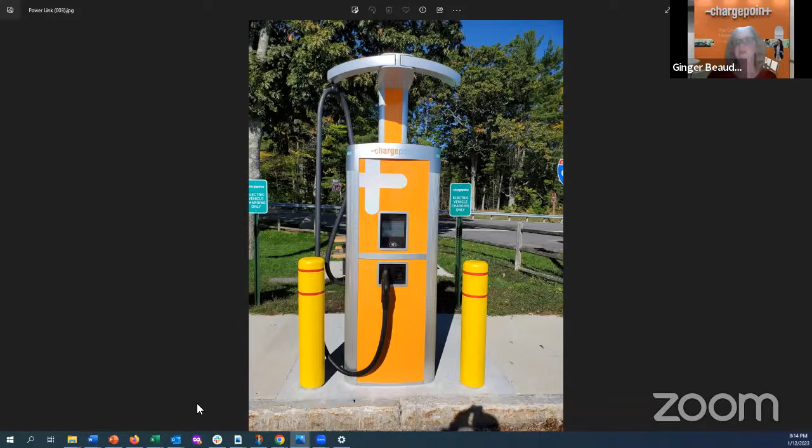The bollards that we have now are white, those are staying, so we're not getting new ones. What are those called? They're bollards, they're concrete here, it's really to prevent somebody from backing into the station. Yeah, protection. So bollards stay as white. Correct, yep, we're not changing the bollard. So what's out there right now is what will remain.

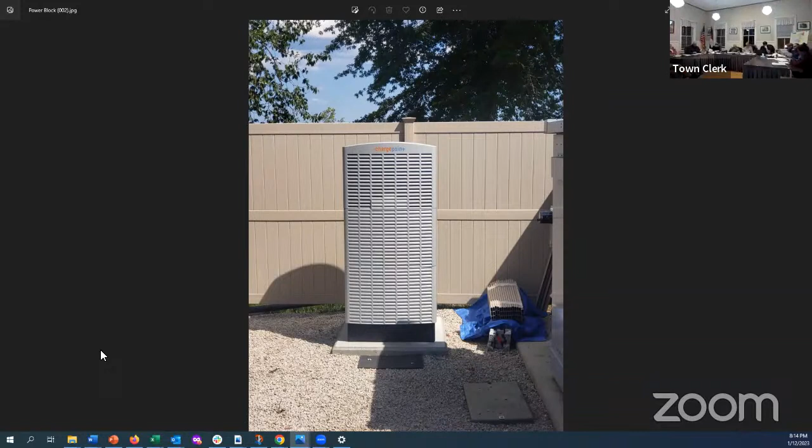Now, there is a new power block? Yes, I do have a photo of that as well. And is there any new switch gear? No, we're using the existing. We would love to get the existing colored. The existing was supposed to have been painted dark gray, and it was not painted dark gray.

I can look into that. I don't know that we have the ability to, I'll have to check and see from the manufacturer whether that can be painted. So that's what was agreed to in the first submittal, dark brown or dark gray.

Okay, so this is what we'll be adding, just the small power block, correct? And that's the piece on the ground. That's this right here, yes, this whole unit. Oh, that whole unit. Yeah, that should be colored as well, dark brown or dark gray.

The issue that we have with that, I've spoken to our engineering because I did hear your request for that. This is our power cabinet, so if you think about it like a server for a computer, you have to keep the temperature controlled because there's a lot of electronics in there. Our engineers say going any darker than that is going to heat up the inside of that cabinet and cause our equipment to overheat. So this is as dark as we can go. It is a gray, but we can't go any darker than that or it's going to create issues from a heat perspective.

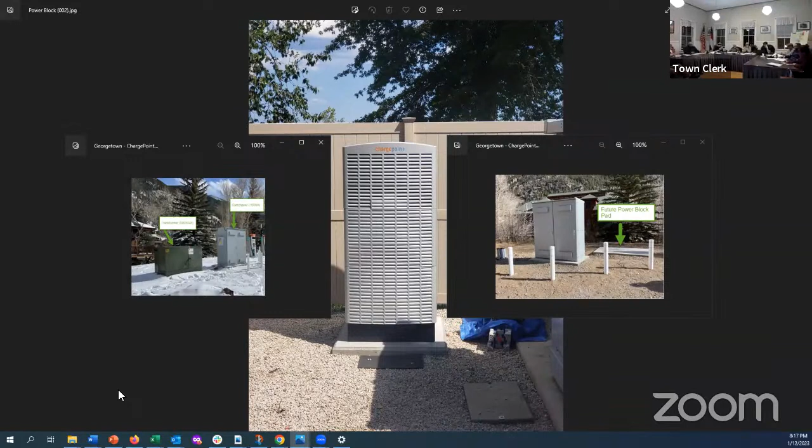Transformers can be colored. I think I'm asking to make everything the same color other than the Xcel stuff.

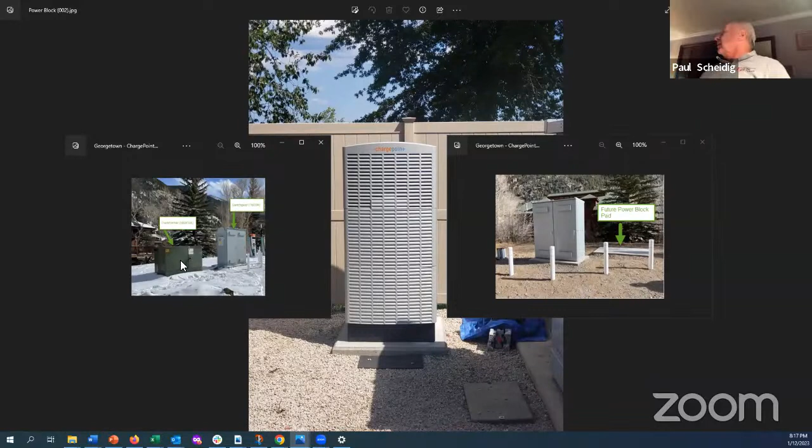So what needs to be changed then? Whatever the switch gear is going to be. This is the switch gear. And your request is that this be painted the same color as the transformer? No, that's it right there. Yeah, it's just...

It's too dark. So the new one, the new switch gear set back, would be painted the same color. Right, so here's what's existing. This is the transformer and then this is the switch gear.

Then your new power pods, could they be the same color as the switch gear? Yes, roughly. I'm not on site, but I can take photos of it and confirm. It's going to be very similar. What we're asking is to paint the switchgear.

And is there any possibility of your coming on site? Yes, I'm actually right now waiting for confirmation about whether I'll be coming to Colorado, flying into Denver early next week. So I'm absolutely able to come out there if need be.

Be great. What we're trying to accomplish here, this is looking very industrial, and this does not fit in our community, so we're trying to mute this look of industrialization and not have a big row of different colored boxes. Right, and we don't want a whole bunch of different colors.

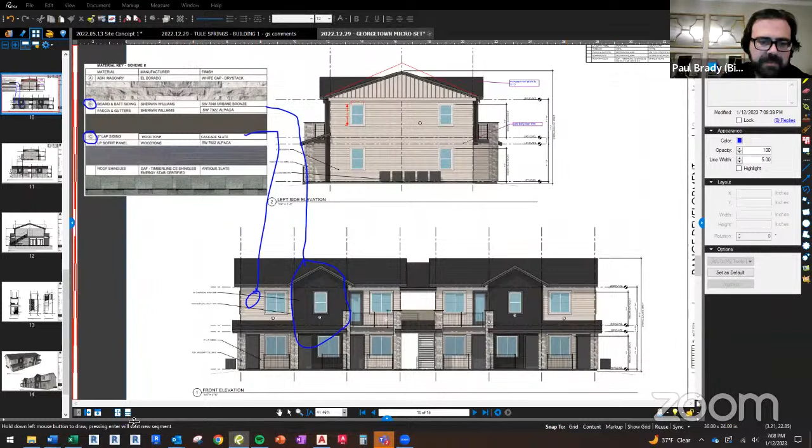I guess it'd be helpful if we just had a favored schematic that you guys want to see. There's five buildings on the site plan, clearly we could do three different here and these two would be something of the same, whatever you think would be right.

I see these two sort of looking the same. Basically it's the lap that changes the most. Yeah, basically the same, just slight, subtle differences, but we recognize the difference. So it's not a drastic difference with all the schematics. No, it's not, other than the sign.

Do you see what I'm talking about on here? It's on the back, it's the bottom one. No, I just handed these out. Bob has one there. We can share. Okay, I'm gonna give it to her. We should get rid of the purple one, it's out. Okay, so shall we mark that out? Yep, it's just gone, we're gonna give you our druthers.

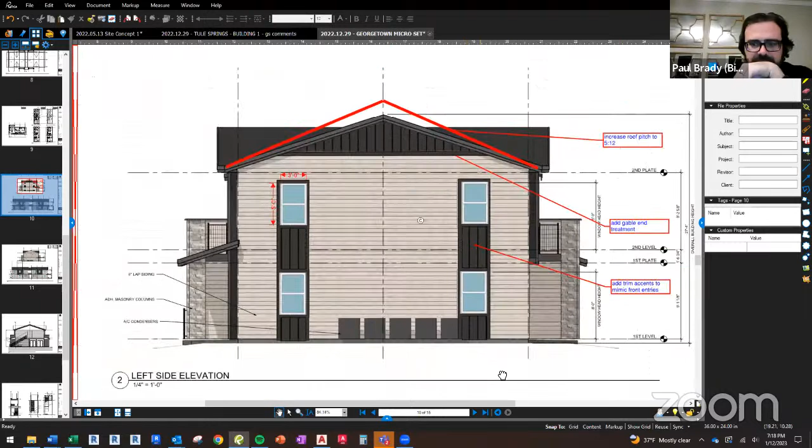Just been kind of drawing something that increases the roof pitch and brings in that accent color. The banding with the windows kind of plays off of what's going on with the entries at the front there.

Doesn't do anything for your center though. Yeah, still want to break something right down the middle. Okay, well, we will explore that. Horizontally, you're talking about, right?

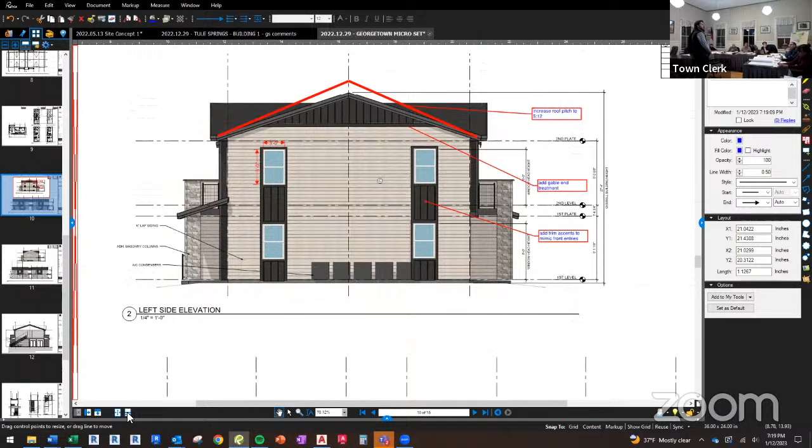There's something in the middle to break that up. Yeah, drop something straight down from the center of the gable. Rusty steel. He's not kidding - no, I'm not, I mean you've done that quite a bit recently and it really works. It breaks things up and has a vertical texture look to it. Maybe get a little pop out, even if it's 6 inches.

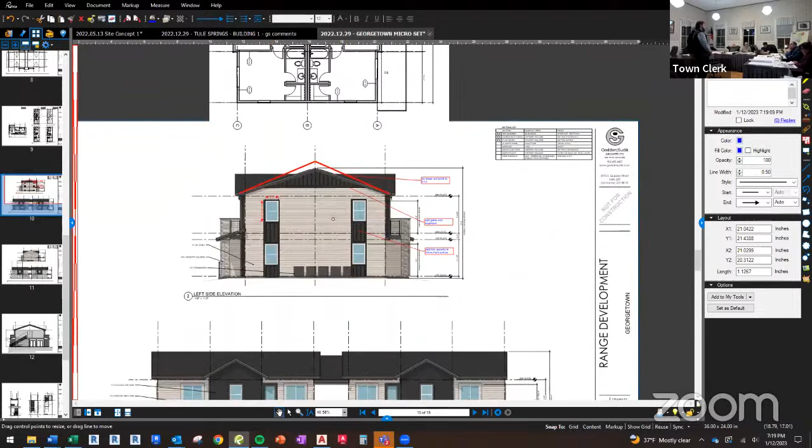Yes, right through the center. I took it was a fake pop out - that's right, just something to give us some dimension. Okay, those sides are gonna be this wood textured siding now, so what are you talking about the pop out being - something different, more than that? Rusty steel, here's a bright - think about it.

Yeah, no, I'll think about it, but thank you for the incremental feedback there. So it's not just a flat wall, but the gable is just much nicer.

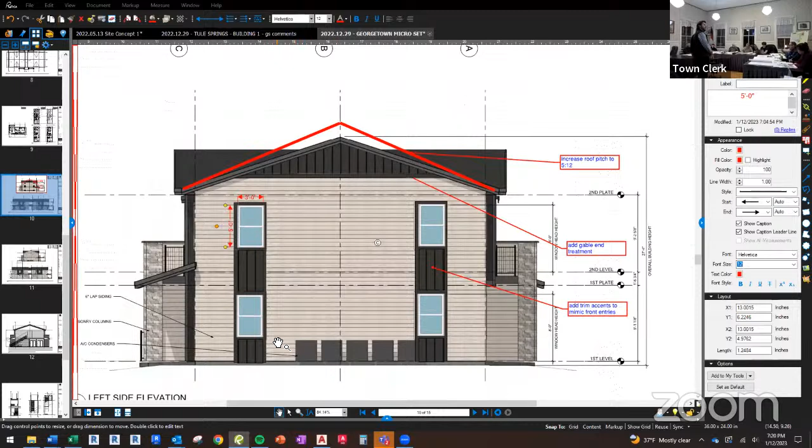Windows are not bright white trim on here, are they? Well, everything's dark, we can specify a tan. Because everything's dark except the window trim. Yeah, you wouldn't want - maybe I can put a lighter window trim on.

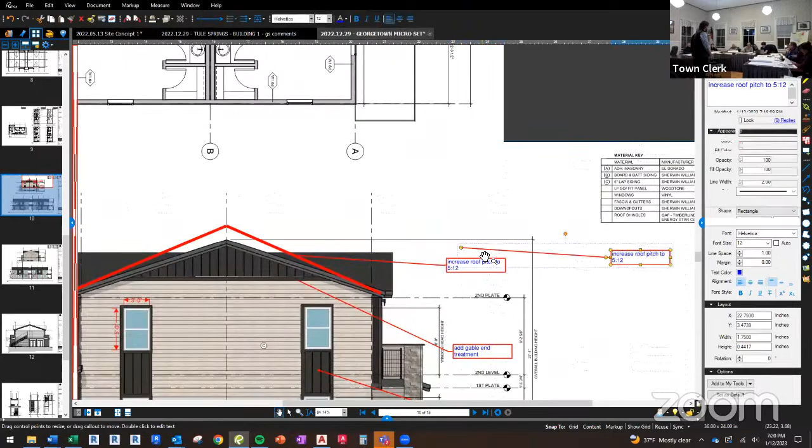Lights. Those don't get added for another 25 years.

For us to just keep things moving, is this site plan an acceptable site plan? I think so. I believe so. We'll definitely have our engineers get started. We're down to the details. I want to start more, I'd start tomorrow if I could. Let's get the team ready.

So what is our process from here, though? Because at this point, we're not complete enough to issue a certificate. I guess we need a list of what we still need. Well, you can start with approval of the site plan for what you want to do right now. Yeah, but to approve the project going forward, we still need details. We have several changes here that we made, and I don't know what else we need, because we're not issuing a certificate for a site plan.